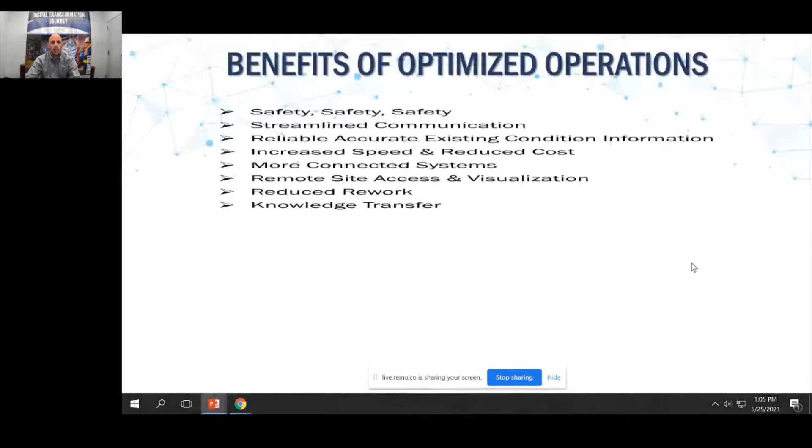But why would we change? The way we've been doing things is working fine for us. I get to hear that a lot. By embracing change, leveraging technology, and utilizing a digital transformation approach, you're able to achieve your goals, oftentimes more quickly and with less effort and at a lower cost. On the screen, we have listed some of the most common benefits that our clients and our staff regularly realize from utilizing technology, safety being first and foremost. Keep in mind that just like every project is unique, every technology solution is unique, and the primary benefit will vary greatly from project to project.

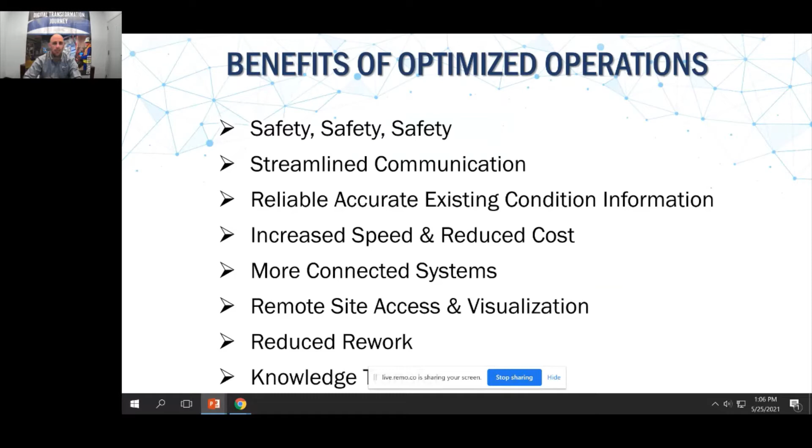When you look at these benefits, which one interests you the most? Please feel free, comment your favorite in the chat, and we could discuss it further at the end of the presentation. When we look at projects, there's rarely an overabundance of time and money. Over the course of this presentation, we'll show how you can leverage technology to optimize your operations, saving you time and money while maximizing safety and mitigating that risk.

To provide a little bit of context on who we are, Borton Lawson is an ENR Top 500 full-service engineering solutions firm with national experience that is enhanced by PVT, or Precise Visual Technologies. PVT is a technology-driven group focused on providing engineering-driven virtual and visual solutions. Borton Lawson and PVT's investment and focus on connecting engineering and technology enables our teams to execute services that optimize operations within that larger digital transformation strategy.

Digital transformation doesn't need to be the 800-pound gorilla in the corner of the room. Everyone knows that they need to address it, but it can be intimidating to know where to start. Technology should be a tool that saves us time and money. Our digital transformation approach is focused on optimizing your operations. This optimization frequently begins with the digitization of your assets.

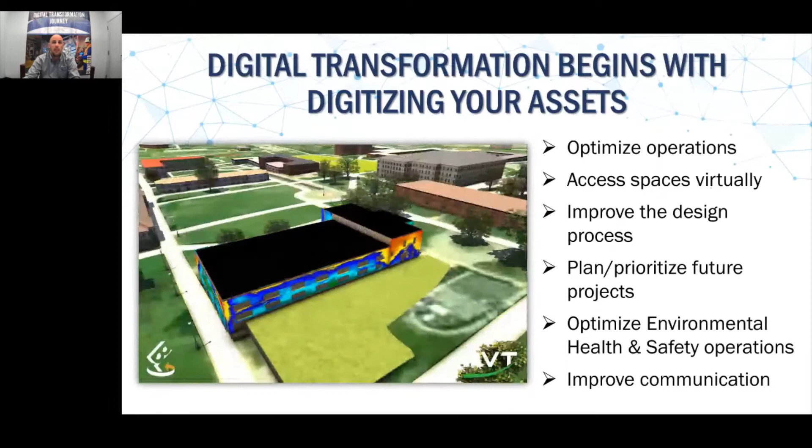Like I mentioned, digital transformation begins with digitizing your assets. By digitizing your assets, you're able to capitalize on many of the benefits listed on the screen, ultimately saving time and money.

Now that we've covered what digital transformation means and some of the high-level benefits, I'll let Heather get into some of the case studies that showcase how the technology can really be used. Heather? Thanks, Walt.

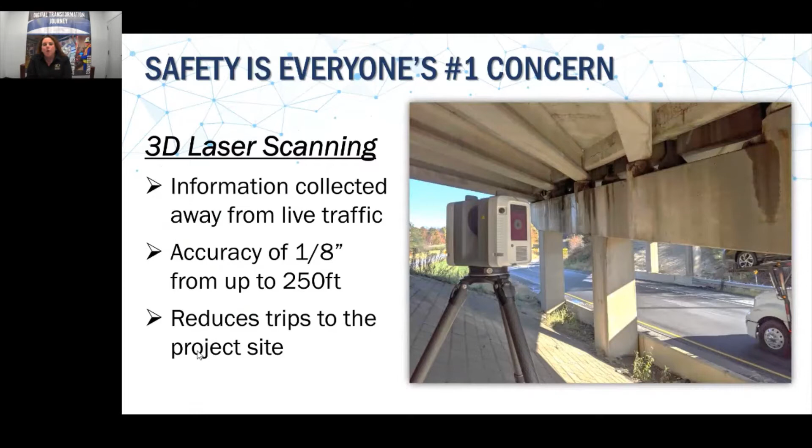All right, safety is and should be everybody's top priority. Our workforce is our greatest asset. Have you ever had a flat tire and had to pull over on the side of the interstate? Did you feel safe? Imagine working in those conditions every day, focusing on your work while trying to stay safe. With 3D laser scanning, your employees can effectively and efficiently do their jobs without putting themselves at risk.

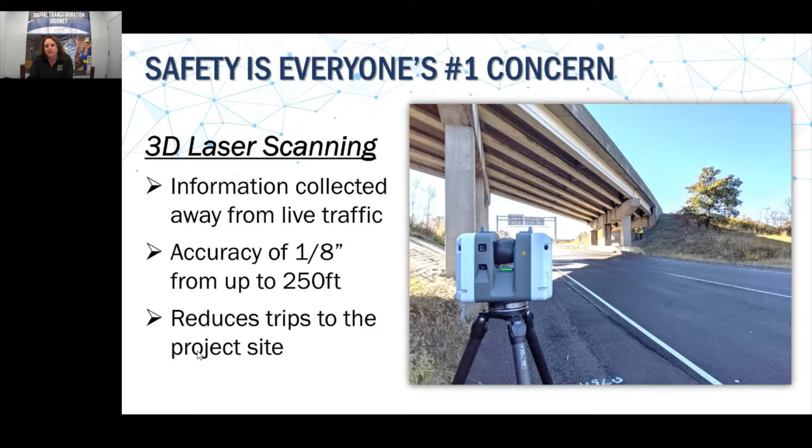This is a short video of the I-81 Moosic Bridge scan that was recently performed for PennDOT. The scan took just 1 hour to complete, and in that hour they had 17 different setups to ensure they captured the entire underside of the structure.

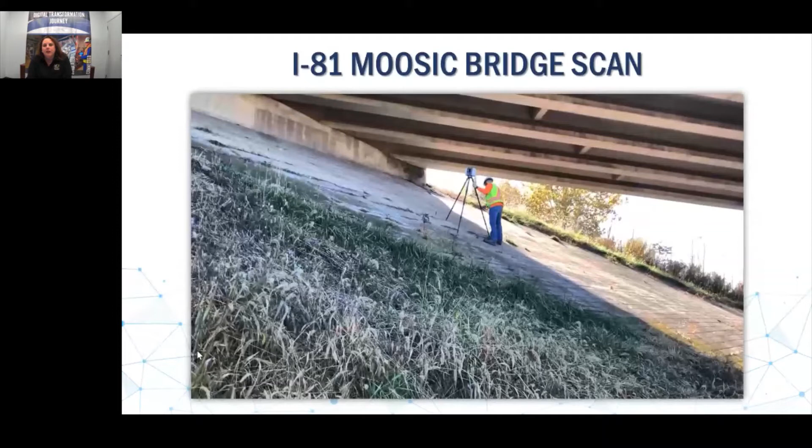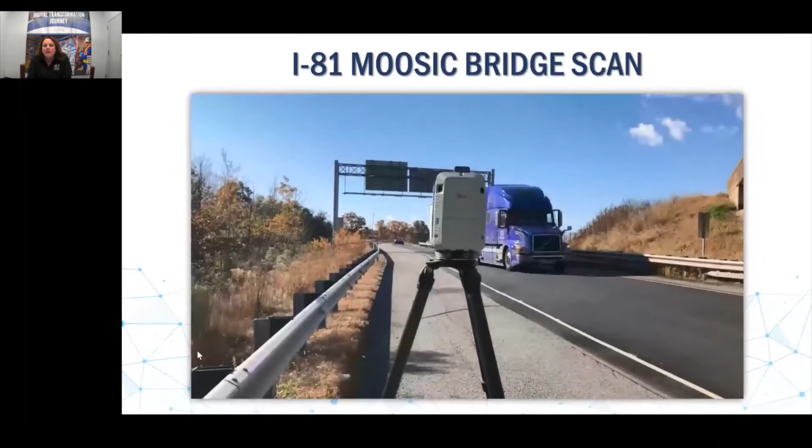While Steve moves the scanner, Jim views each setup on the iPad, ensuring that the required data is accurately collected and determining where the next setup should be. As you can see, each of these setups were performed from either the shoulder of the road or behind the guide rail.

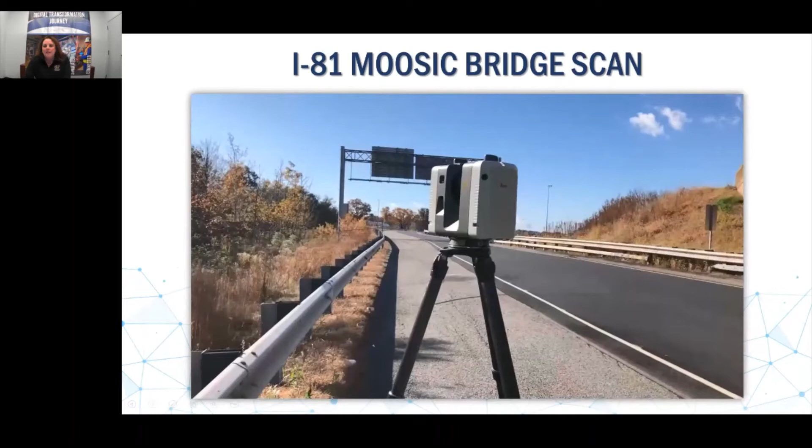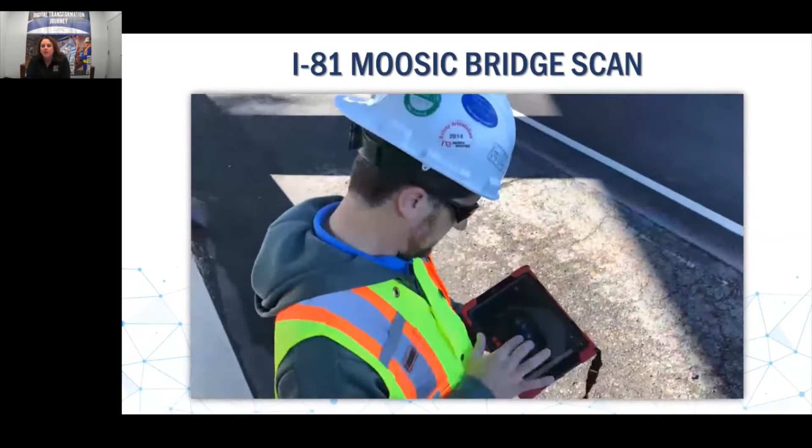There was no need for high lifts or special equipment to obtain the accurate information. Within 1 hour, they were able to collect 490 million points of data to the accuracy of 1/18 of an inch. Our scans also come with TrueView technology that provides scalable 360-degree photos that allow you to move around, zoom in and out of your project.

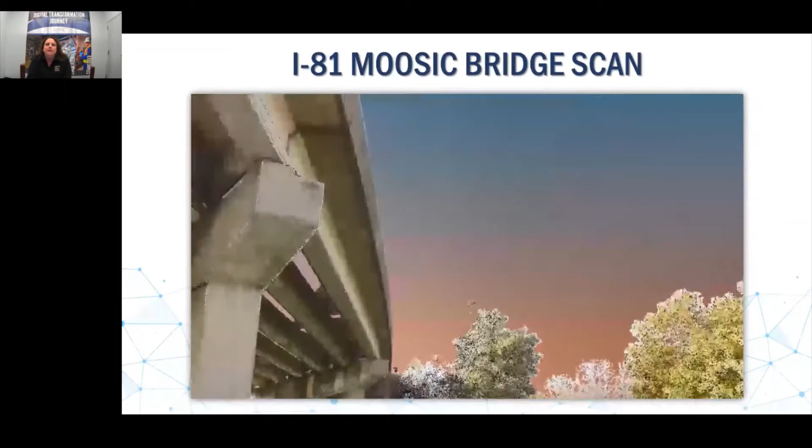Each of these points, the 17 triangles that you see, represent the scanner locations. This is a 3-dimensional point cloud that resulted from the field work. Being able to virtually visit the site, take measurements, and create markups with notes improves efficiency and workflow. This function is particularly useful for team meetings and discussions about a particular area of interest.

Sometimes access can be a challenge to obtain survey data. For this project, we were asked to modify an earthwork stockpile, which the public felt was too high and a visual obstruction.

Traditional survey would have been a substantial amount of time to complete. Therefore, we suggested to do it by drone. The drone took approximately 20 minutes of flight time. Reducing the height of the stockpile was the goal, while not modifying the overall footprint for permit reasons.

Accuracy of the drone scans is dependent on the number of ground control points. The more points you have, the more accurate your scan will be.

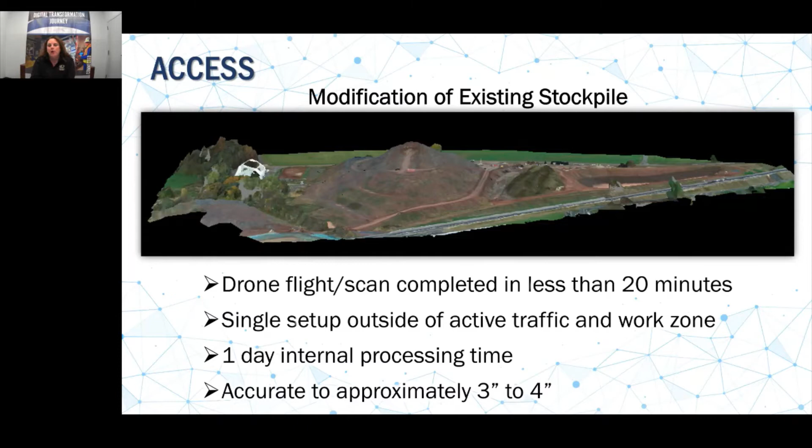After the flight, a point cloud was created, which can be utilized for measurement purposes. The image is stitched together to form an orthomosaic image, which can be georeferenced for overlay onto construction drawings. Or a 3D mesh can be created as a surface of the existing features for design purposes.

So for this project, that's what we did. A 3D mesh was created for use in the Bentley software in order to create an alternative model for the site, so we could produce volume calculations as well as contours for the plan modification. This technology is also useful for quantity verifications in construction projects or for quarries.

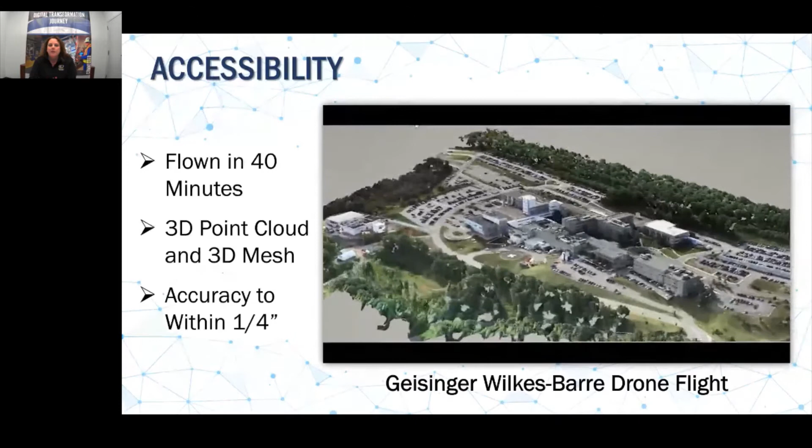As noted before, the accuracy of the drone flights can be improved with increased ground control points. This is a 50-acre Geisinger Hospital campus in Wilkes-Barre, Pennsylvania. 60 control points were established prior to the flight. The drone flight was completed in just 40 minutes and resulted in data that was accurate to 1/4 of an inch.

Although safety, speed, and access are important, the most important thing in design is accuracy. For this project, we had a fully enclosed culvert under a borough street. The culvert has open channel sewer flowing on both sides and Mahanoy Creek in the center channel.

From inspection reports, we knew that the sections were comprised of multiple different structure types, and there were no as-built drawings to provide elevations or dimensions.

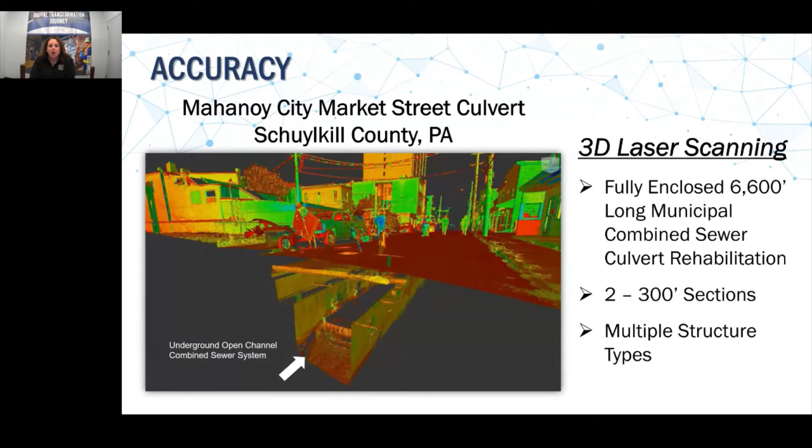Like I said, open flow sewer on either side. That's all I have to say.

Control was run through the project area using a Robotic Total Station through manholes to drop down control points. Utilizing harnesses and tripods along with confined space equipment, our surveyors and equipment were lowered down into the culvert to tie into the control and perform the laser scan.

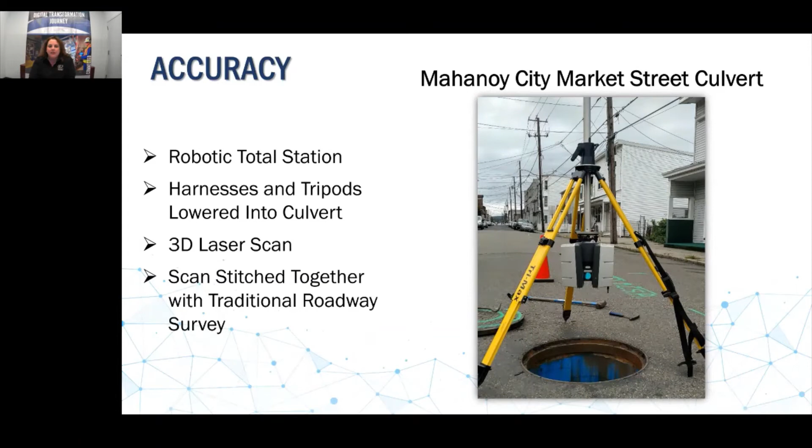This section of the culvert was approximately 600 feet long. All aspects of the culvert were gathered with extreme accuracy. The data was processed in the office and combined with traditional survey that was collected topside.

The scan provided millions of points inside of the culvert, giving us a full as-built, which made the design and the replacement of the superstructure feasible.

The accuracy of the field measurements allowed the design of the concrete slab to maintain the existing beam seat elevations. Knowing the existing superstructure depth allowed the concrete slab to be designed and maintain the low chord elevation, aiding in our H&H analysis and obtaining the required permits.

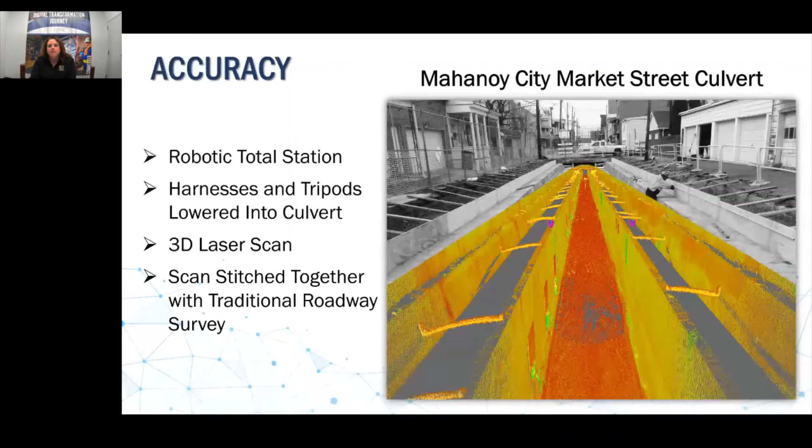Knowing the superstructure depth also helped us maintain the existing road profile. This is important as the existing roadway grade was flat, very, very flat. The existing gutter lines had minimal curb reveal.

In order to maintain that positive drainage and not impact the sidewalks and the houses, which were directly adjacent to the roadway, the accuracy of the design also allowed for more accurate quantities to be produced compared to approximations that would have been done with hand measurements.

This data was also very useful for the contractor when developing his means and methods of construction, with an accurate depiction of the interior of the culvert, which he couldn't see without entering through confined space or demolishing the top portion of the structure.

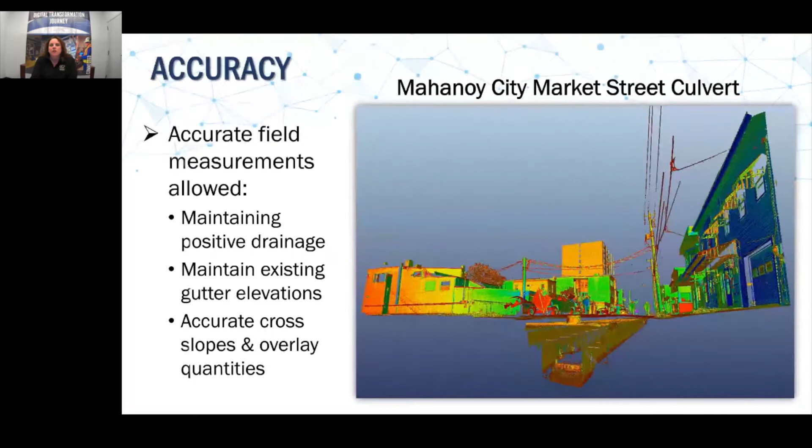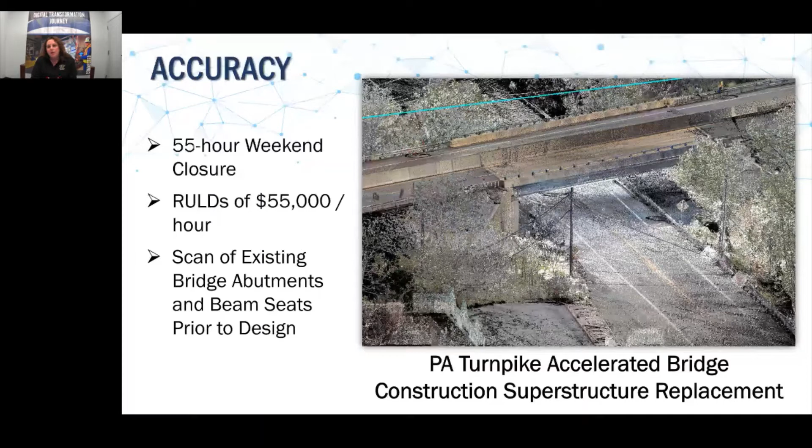For another project, the Pennsylvania Turnpike advertised a project that included a 55-hour closure weekend to complete the full superstructure replacement. The design had to fit within the existing abutments for the closure window to work. The contractor faced liquidated damages of $55,000 an hour, sustained for any hour beyond the 55-hour window.

Scanning of the existing bridge abutments and beam seats was key to establishing the accurate existing condition so that the replacement structure could be craned into place without incident. And I wanted to note, we opened a half hour before our 55 hours.

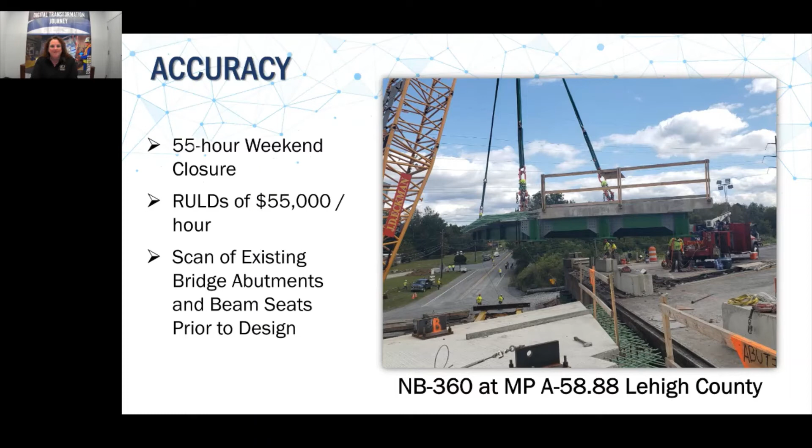From the scan of the structure, we were able to create a highly precise model, capturing all applicable dimensions of the structure. The model was then utilized to design and fabricate fitted steel arch liners that will significantly improve the structural capacity of the stone arch and remove the structural deficiency rating.

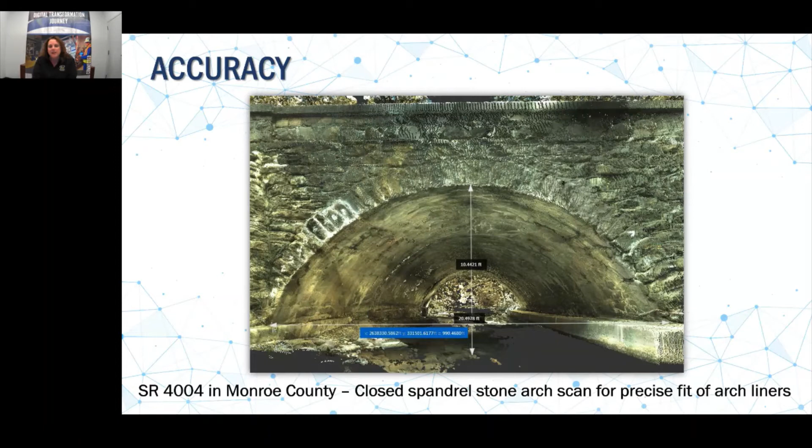The design and the detailing of the repointing of the stone spandrel walls and the repairs to the structure are easily defined and tabulated due to the preciseness of the scan.

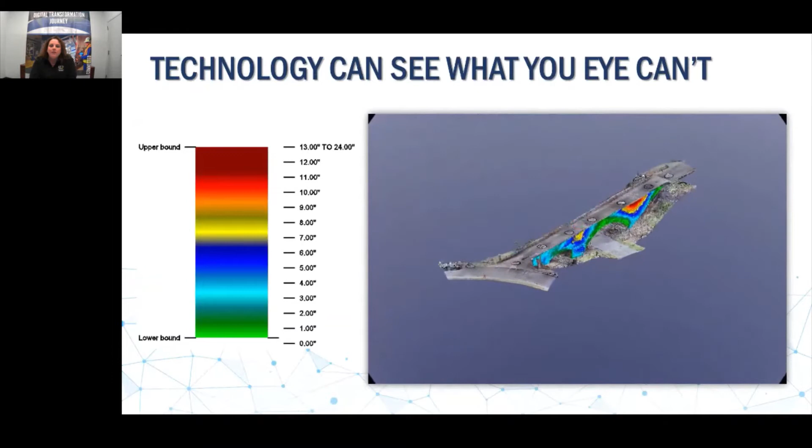On this stone arch, the spandrel walls have been bulging in different directions and severity for quite some time. Our field crew collected data from 25 different locations in just one day. The heat map that you see here was produced to show the areas that were bulging more than others.

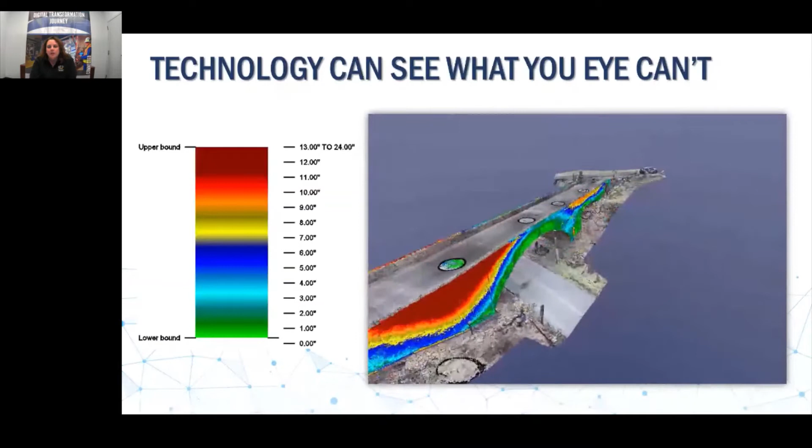Color changes are set to 1-inch increments. The areas in green represent 0, and the deep red represent areas of greater than 10 inches.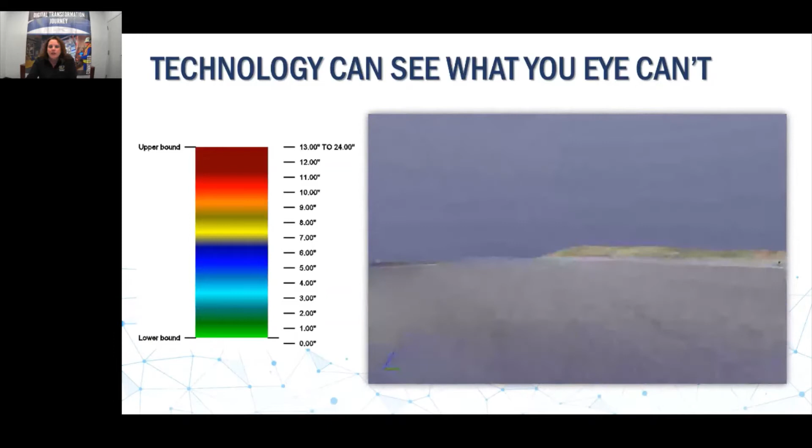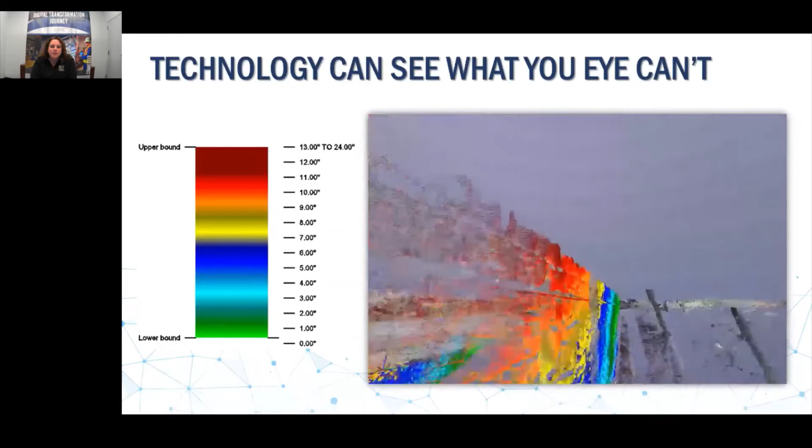In the areas of concern, tighter increments can be shown when zoomed in, and measurements are accurate to 1/8 of an inch. By scanning and producing a heat map, we save time, measurements are accurate, and the location of the bulging areas of concern are easily and precisely pinpointed.

This is a short demo video of a scan that was done on a 660-foot long linear section of Spring Creek for a virtual field meeting with DEP, Army Corps, PA Fish and Boat, and the Conservation District.

Similar to Google Earth, you can reach different segments by clicking on the next data point. Each of the points you see here are setup locations. As you can see, similar to the Music Bridge scan, we have 360-degree views of the existing stream channel.

The TruView software allows for spot measurements, such as lengths, widths, angles, and will even give you latitude and longitude locations of each point for precise location identification.

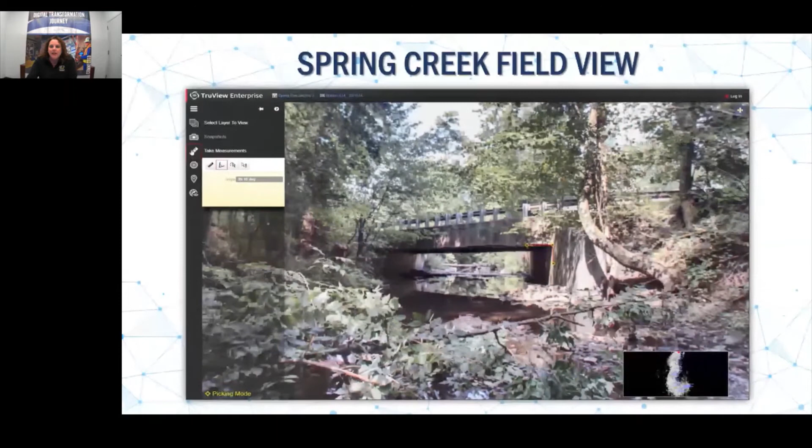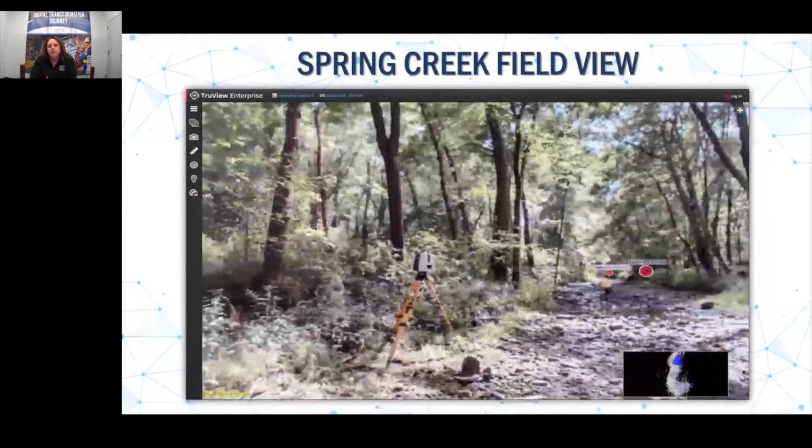This technology is very handy for the world we're living in today, but in a post-pandemic world, it can be very useful as well. How long does it take you to get multiple agencies to set up a calendar appointment for a field view? This technology allows you to visit the site from your office or home with no travel time.

So if a picture is worth 1,000 words, then I say a video is worth 1.8 million. Making our client's vision a reality.

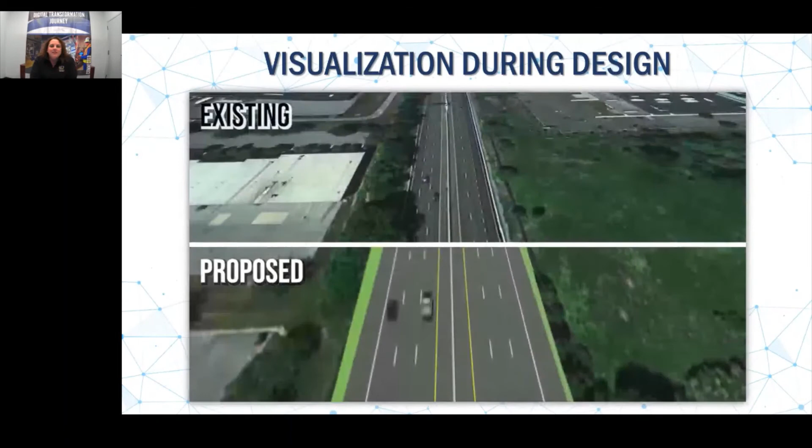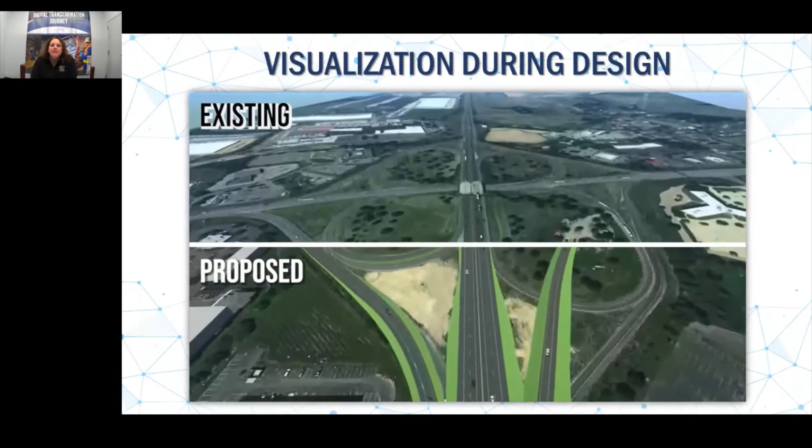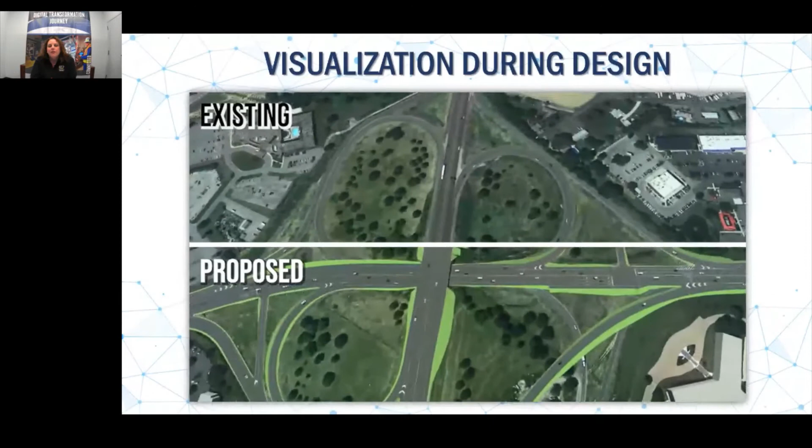This interstate reconstruction project included the reconfiguration of several ramp movements at this high volume interchange. By developing a 3D rendering, you're able to help your clients and project stakeholders who are not familiar with viewing two-dimensional engineering drawings. This rendering was put together using Concept Station to develop a 3D fly-through of the project.

The 3D software does not only create pretty pictures, but is a construction-driven engineering tool that helps designers refine best practices and integrated 3D conflict analysis tools for accuracy, decreasing unintended errors and omissions to save time and reduce construction change orders.

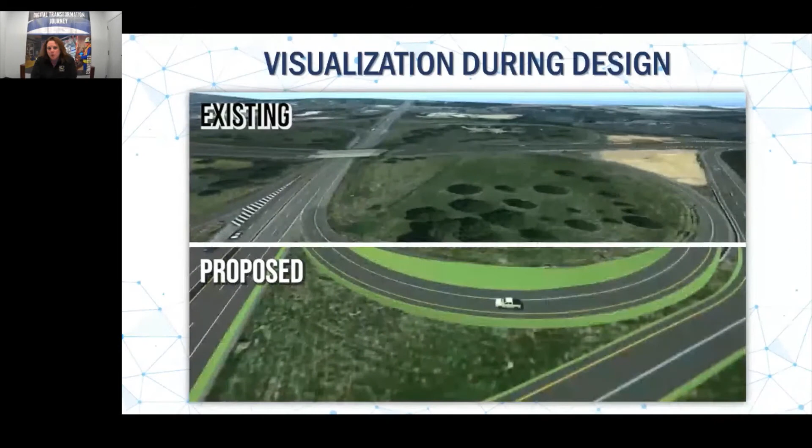This will enable you to review plans in 3D to easily identify inconsistencies. You can also review clash detection in 3D or table format, which helps you with the ripple effect when changes are made during the design process.

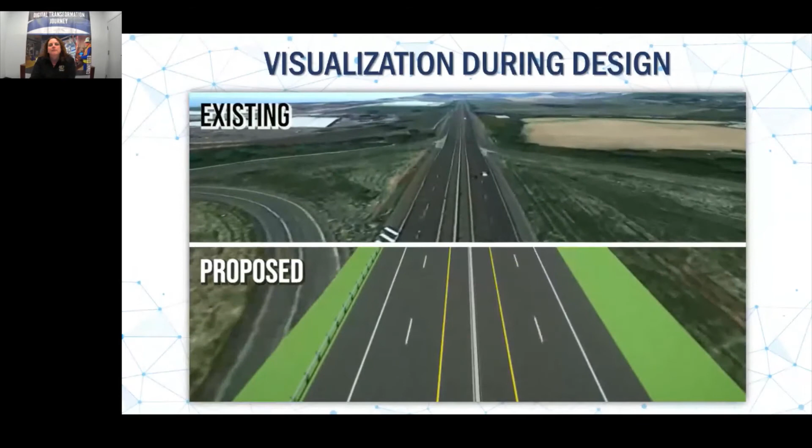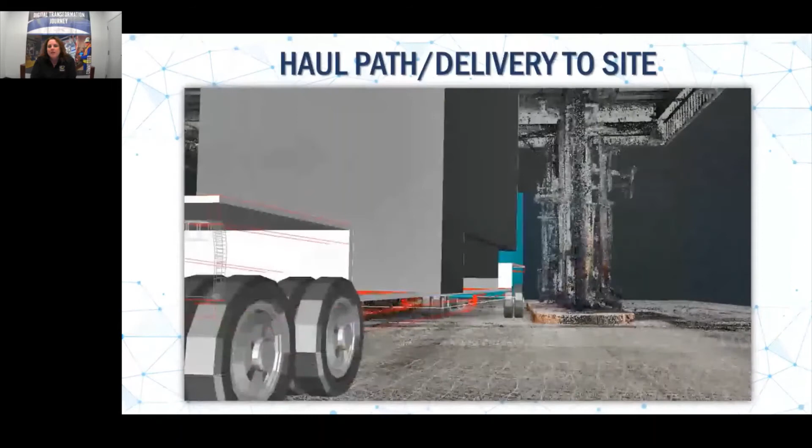So an engineer designed it, a precaster made it, but can you get it to the site? Delivering and maneuvering large pieces of equipment or precast elements can sometimes be a challenge. We can create 3D models of equipment and bridge elements to virtually transport equipment and materials to a construction site. This helps validate the best haul path and identify any interferences that you might have.

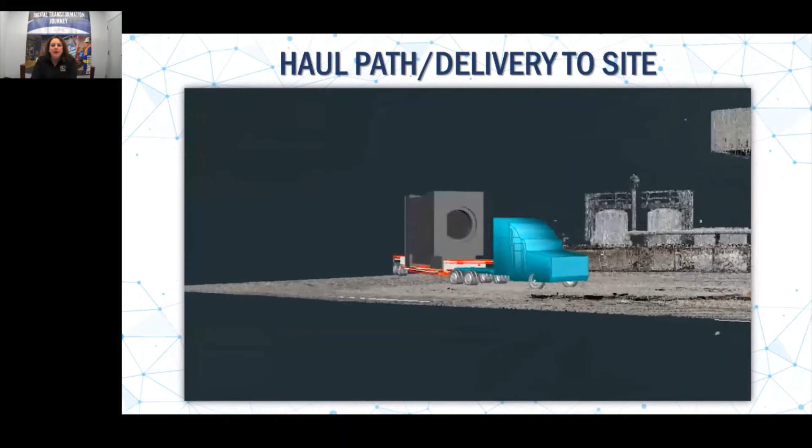Thank you. This concludes our presentation, and we would be happy to answer any questions that you may have.